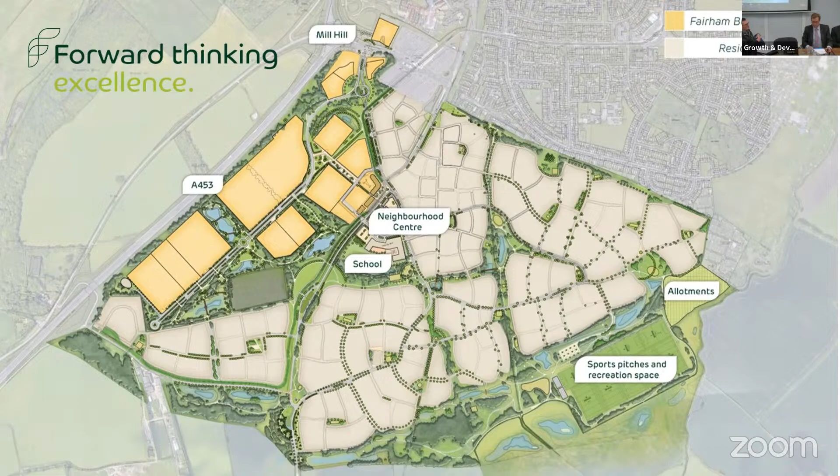In terms of phasing, there are 13 phases to the housing development, and in addition we have the commercial/employment phase, a neighbourhood centre, lots of landscaping, a sports pitch area, and an ecological area as well.

In terms of the phasing, we have already agreed terms with 3 house builders. Phases 1 and 3 are at the top end of the site towards the edge of Clifton, and phase 2 is at the southern edge of the site next to Barton Lane. Those are going to be the first phases to start, and we're hoping they will be starting very soon.

We have also identified a house builder for phase 4, and we are currently appraising the 5th house builder, so very shortly we will have 5 identified house builders on there. I think it's in the public domain that the first 3 are Redrow, Countryside, and Barratt's, and it would be unfair of me to name the other 2 just now.

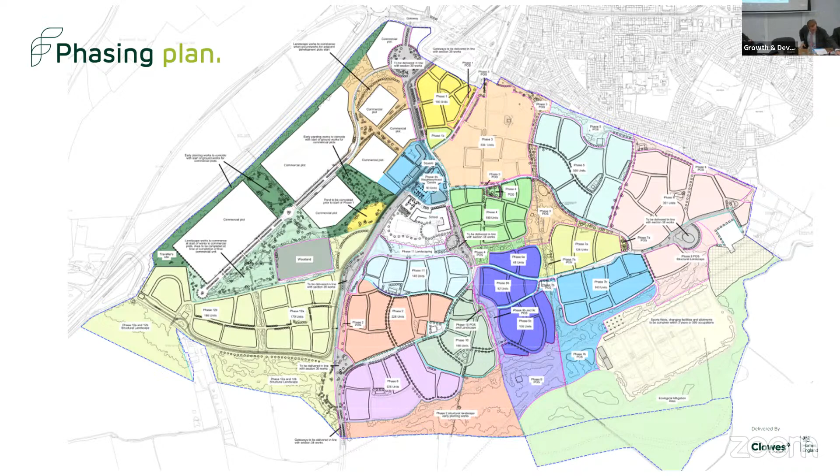I'm going to hand over to my colleague Ali for the next few slides, and then it will come back to myself.

Thank you, Rob. My name is Ali Malik, I'm a Director of Infrastructure at Clowes Development. So what I wanted to do was go through what we've been doing on-site and elaborate a little bit more in detail.

Over the last three to 3.5 years, we've been very busy with our design team in terms of infrastructure planning, engineering designs, seeking approval for highways, utilities, and drainage. That's the backdrop of a lot of the work we've been doing. After that, we've been tendering work with contractors, and then going out onto site doing physical works. What you see in green is predominantly the main piece of works we've been undertaking over the past 3 years. The areas in green are either completed infrastructure, nearly completed, or in some cases immediately about to start, with minor finishing works effectively remaining.

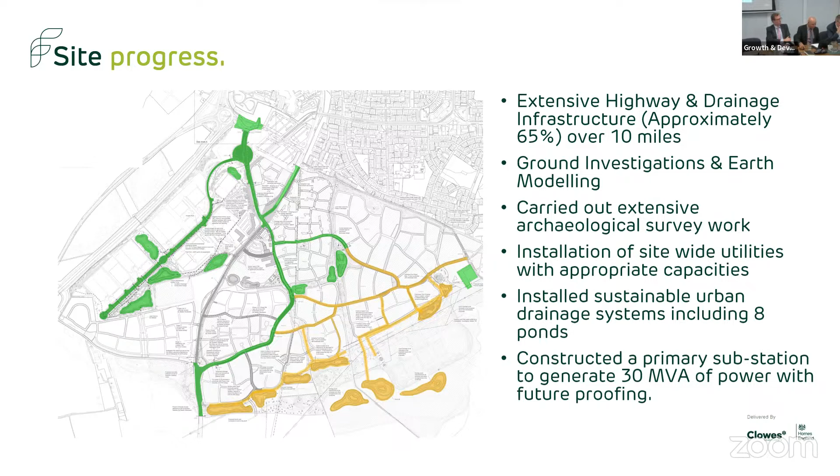So moving on, but some other elements that I think are useful to understand about what we've been doing over the last few years. When we took the site on, we inherited about 80,000 cube of leftover tram spoil - equivalent to about 5,000 lorry loads coming off the site. We looked at whether we could amalgamate that within the site, and that's exactly what we've done successfully. Our engineers looked at the material and we've effectively amalgamated it within the site for our overall earthwork modelling and cut and fill strategy.

More recently, since we started these works in September last year, we've been working on the Park and Ride access road, which probably everyone has driven by. This is the gateway to the site, effectively, so it's been really important. It's been a little way in the making to get to this position in terms of planning, engineering designs and approvals. The Northern Gateway, the roundabout to the south of the Park and Ride access, is also part of the works we're working on at the moment. We anticipate finishing that in early to mid-April.

The strategic foul sewers is one of the things that's quite important to note. We looked at the extent of sewers needed, the capacity with Severn Trent Water, understanding the development - it's a large scale development - and the extent of capacities needed. We did very early on a modelling exercise with Severn Trent to discuss what capacities we needed. There were some off-site reinforcement works that we needed to do, which we did, and it was probably one of the first pieces of infrastructure that went in, about 2.5 years ago now. So effectively the site is ready and can take the entire development in terms of the foul drainage network.

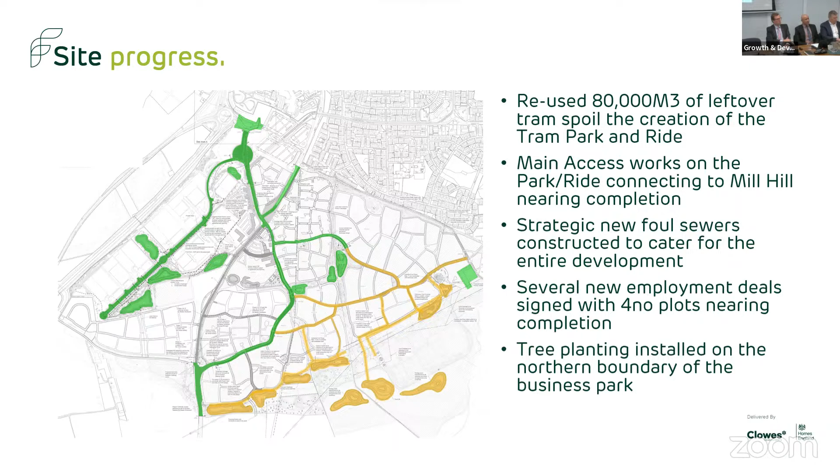I've got to talk about my primary substation again because I'm so proud of it. This is another closer image of the A453 and the works on the Park and Ride. At the top right corner, they allowed me to go in and take one photo - this is National Grid, the actual primary substation, and those 2 transformers effectively serve the whole of the development. Quite impressive, I think.

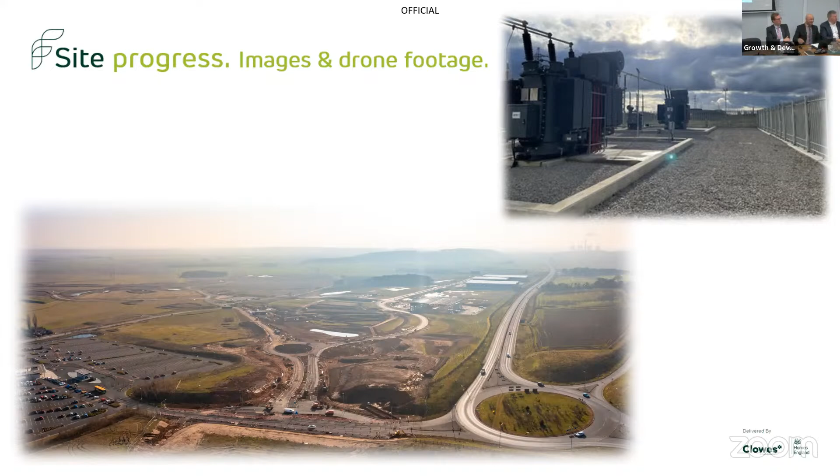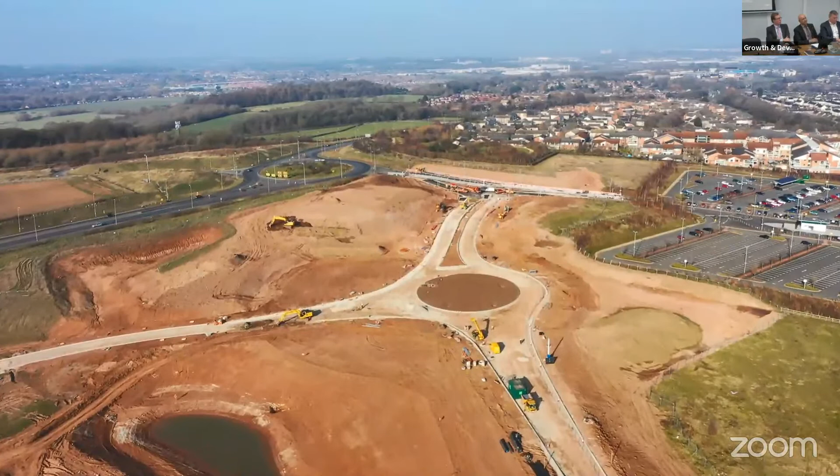Moving on, this is a fly-through drone footage, which I hope will work, showing the extent of infrastructure. Unfortunately it's a little buffering, but it will give a good idea of the development. This roundabout you see here is the Northern Gateway roundabout, and that connects to the Park and Ride - that's the first phase of the Park and Ride works, and there is a second phase. This connects to the A453 Mill Hill.

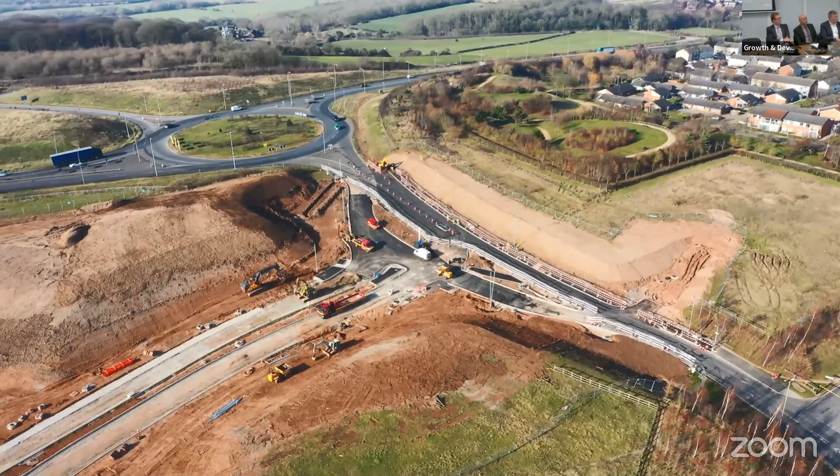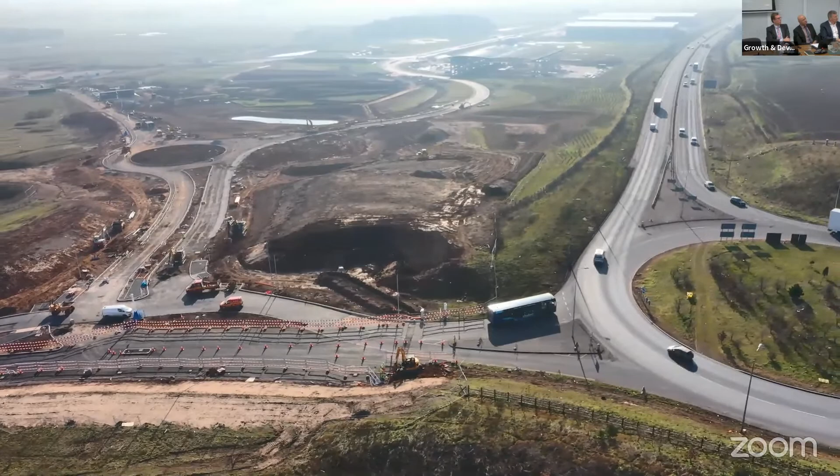So this just gives you a different angle, but what it does show is the infrastructure that's been constructed down to the commercial zone, and it also works towards the stagger junction, which is the heartbeat of the development.

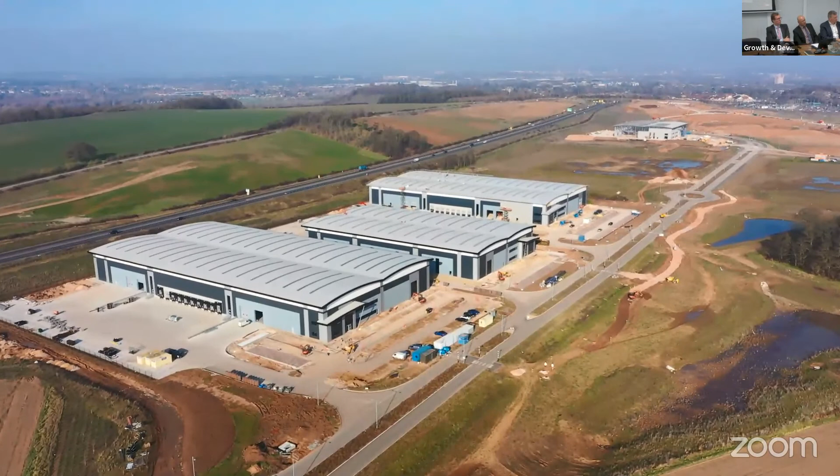And this is just the commercial road, the infrastructure, the drainage that's been put in, the ponds that have been put in to support that, and also the actual buildings themselves. You can see quite extensive earthwork modelling that we've been working on here. It's taken some time, but it's a moving process that we're working with.

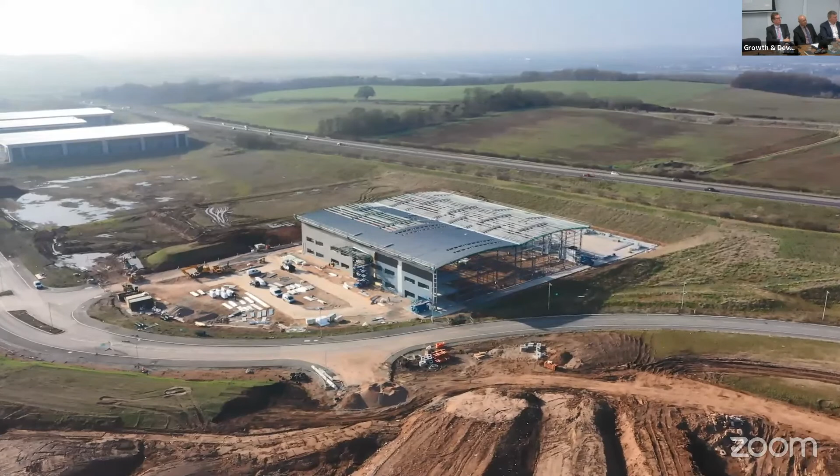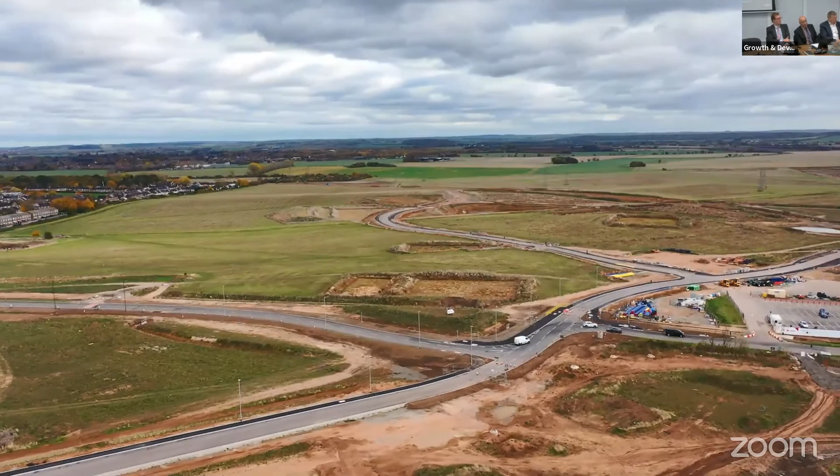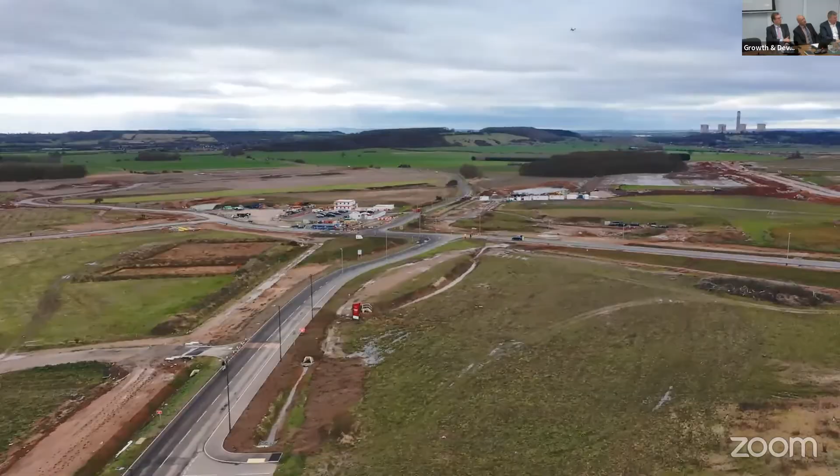This infrastructure was actually put in about a year and a half ago. This was the first main key infrastructure, the stagger junction, which is effectively the heart of the development. Beside it will be the neighbourhood centre, where those white cabins are. And the large loop road running around will connect to Nottingham Road - that is going to be the new Nottingham Road.

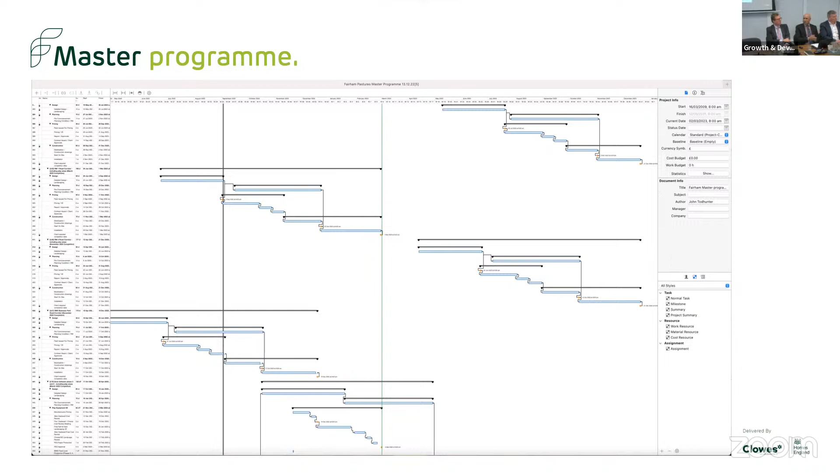As you can see, we've been really busy, doing a lot of work over the last 3.5 years. I think it's important to understand the programming element of what we've been doing. This is a snapshot of the master program - there are many pages and many tasks to it, but it gives an idea. There's over 750 line tasks within our master program, showing the sequencing and work we've done to get to the right sequence at the right time, to effectively achieve what you've just seen in the images and drone footage.

So what are the next future milestones? Well, the employment buildings, we're aiming to have them complete in May 23. The mill access, in terms of what you've just seen, in terms of park and ride, will be complete May 23. We're anticipating housing to start in June 2023, with some completions by the end of the year, so occupations by December 2023.

I didn't actually highlight it, but we've got playing fields to the south of the development, and the aim is to do a lot of earth modelling around those playing fields. They are quite close to the south area, with the view to have that open to the public in June 2024. And as part of our Section 106 obligations, we're currently working on the design for the neighbourhood centre, and as part of that we'll be working on a land transfer of the school and also the health centre, Q2 and Q3 2025 respectively.

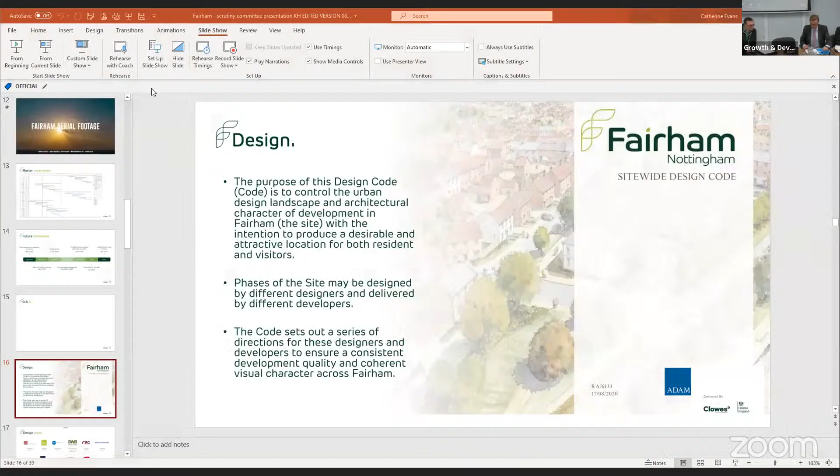So in terms of the design, what we wanted to achieve here is something that was very high quality and a sustainable development that would be very attractive to residents and employees. And what we did here, we had a clear vision when we set out. We wanted to have greater control in this development, so Fairham Pastures Developments, aka Clowes and Homes England, we are taking on the master developer role. One of the key things we wanted to do was set the bar at a high level.

In terms of design, the way we've done that is we've introduced a series of design codes which set out the vision for the site, and as the slide says, they focus on architecture and landscaping. We're very keen to get the landscaping as advanced as we can.

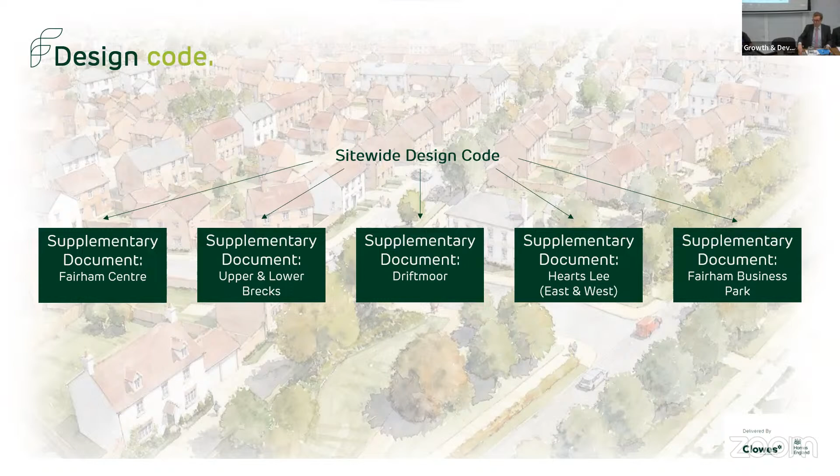In terms of the design code, we had a site-wide design code, and underneath that 5 supplementary documents. Don't take too much notice of names like Upper and Lower Brecks, Driftmoor, or Hearts Lee - they were just examples of neighbourhoods. We will be giving them proper names in future, and might even run a competition to name those areas. The intention is there will be a supplementary document which deals with the neighbourhood centre, the employment area, and each of the housing areas.

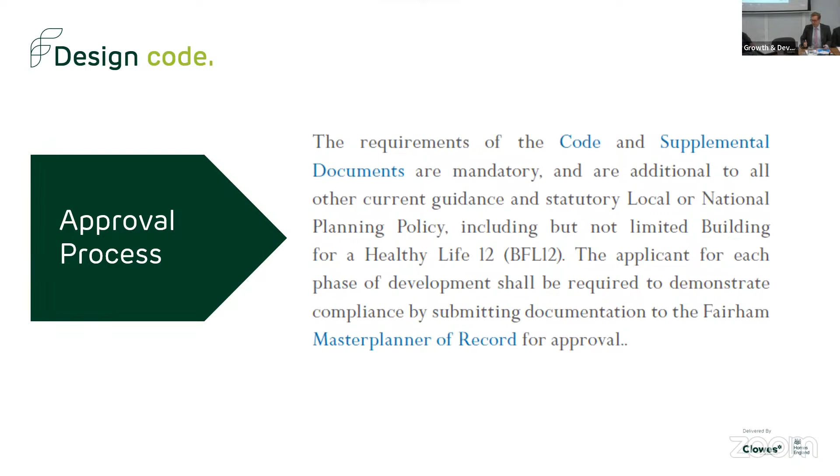In terms of the approval process, Adam Architecture are the master planner of record, and everything a house builder produces effectively gets scrutinised by Adam Architecture on our behalf. Even before then, it gets scrutinised by Homes England and ourselves - I'll show you a diagram in a few minutes. The scrutiny here is right from the very beginning, and every house builder we've contracted with has gone into this with their eyes open.

So the actual design process itself starts at a national level - national policy filters into this, then local plan policy, and then the codes. All of those are supported by individual house builder pledges as well. Some house builders will go way above the normal standards, and in choosing the house builders we've chosen, we've been very mindful to set the scene at the gateways.

So at the Clifton Gateway, where you're coming from the existing Clifton built-up area into the site, from the Mill Hill Gateway, and then from the Gotham Gateway, if I can call it that, we will have developments there that set the tone for the rest of the development going forward. One of our key aims is that we want the last parcel or phase to be even better than the first, because everybody will try to beat the previous phases, and new initiatives will come in from national level and filter down.

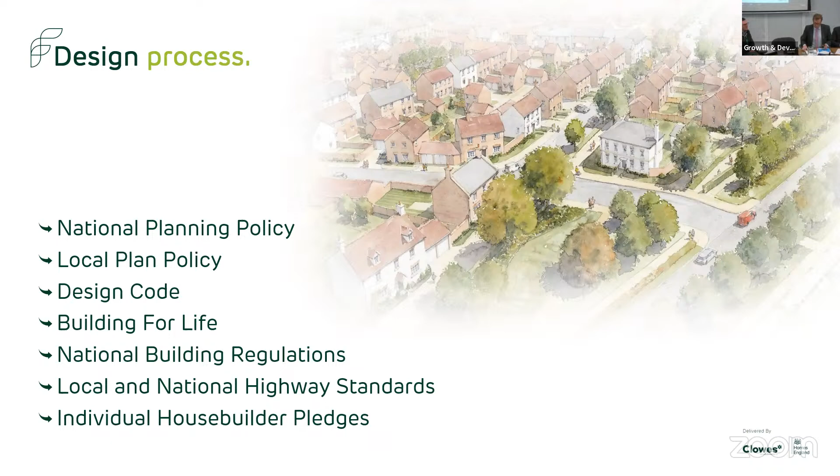In terms of the process, this illustrates it quite neatly. The tender process - when we take land to the market, whether that's Fairham Pastures or Homes England, we aren't just looking at the price. We're looking at the quality of the layout and the house types, and that has a factor in terms of us choosing which house builder wins the site.

The next step is that the house builders submit their plans to us. We review them, and then they go on to Adam Architecture or Urbanism. Having gone through those phases, a planning application is submitted to the Borough Council, and it will be scrutinised again by the development control team, with input from the statutory consultees. So county highways, education, everybody else will have their opportunity to comment on it, and then ultimately the decision rests with the council in terms of the scheme that's approved.

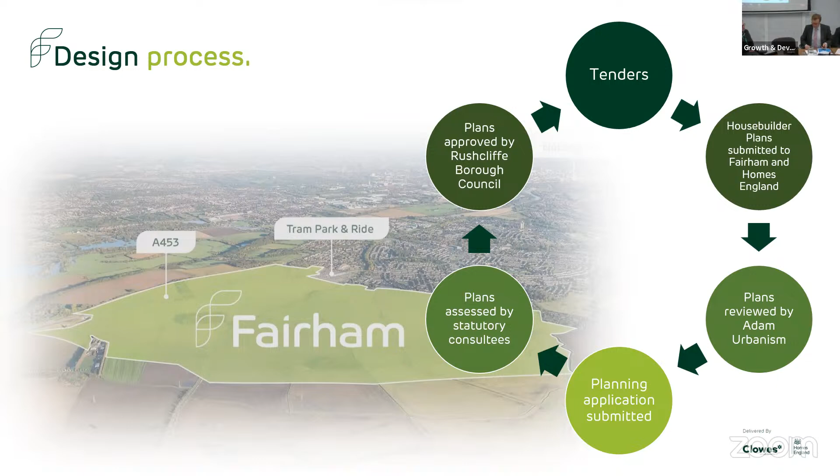So that's the design. Sorry, John, if I've - I don't know if you want to add to that.

I think it's important to say that what we wanted to ensure - I think we see so many developments where they are big developments and you've got individual residential developers on there, and you get this patchwork quilt of different styles, different materials. It was certainly Clowes's vision to ensure that we're going to get a consistency across the site, and that consistency - the cues are taken from the surrounding areas.

One of the pieces of work Professor Robert Adam did, they visited all the villages, all the towns around, and they picked out those cues. So the overarching site-wide strategy does exactly that. It says to the developers, these are the bricks we want you to use, these are the kind of roof tiles we want you to use, these are the style of windows. So you're not going to see mock Tudor or mock Georgian - you're going to see what is a local vernacular.

But the codes are designed in such a way not to pin those guys down so hard you don't get their flair. We still want that flair to come through - it's a consistency across the development. And within the codes there are what we call heat maps, so certain road frontages which are common to all will have greater control, as opposed to what's inside a particular phase, where there's a little bit more freedom for those developers to do what they want. But as Robert says, the drive is that quality.

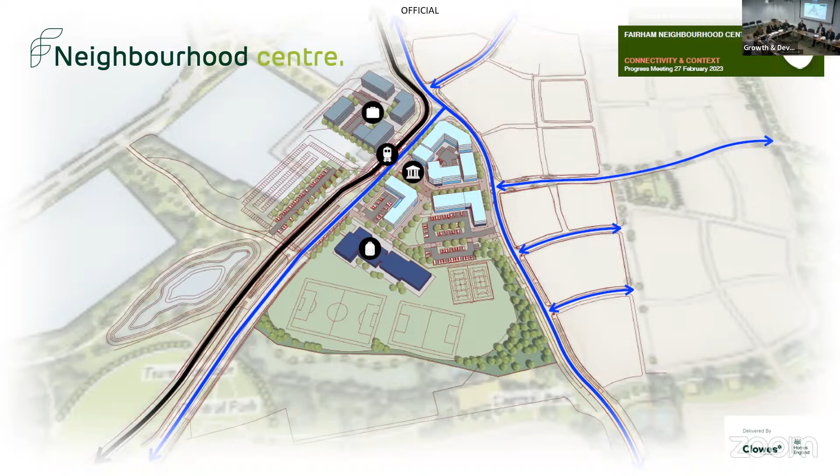So in terms of public transport, we've worked really hard with Nottinghamshire County Council, the public transport department within the council. Our master planners, Adam Architecture, and our engineers worked very diligently in terms of how we can create the space and integrate a really well connected network within the development. We've looked at bus services, bus stop locations, the existing tram stop as it stands currently and how that permeation is between that and the rest of the development and indeed the phasing. We've looked at potential tram passes, and we've been working with NET in terms of how we can encourage development as they come along, what types of tram passes we can provide to effectively encourage public transport.

We've also been doing a lot of work in terms of the future tram extension, how that will function within the development, which is quite a hard task in a way, because that could be quite some time away - it could, depending on funding, various government initiatives and everything else. But we have had to cater for that in terms of where that is going to be and safeguarding a tram corridor effectively, while also considering the now as well as the future and what that will look like. And we've very much looked at our cycleway and pedestrian links and how that ties in all within the development and how it connects.

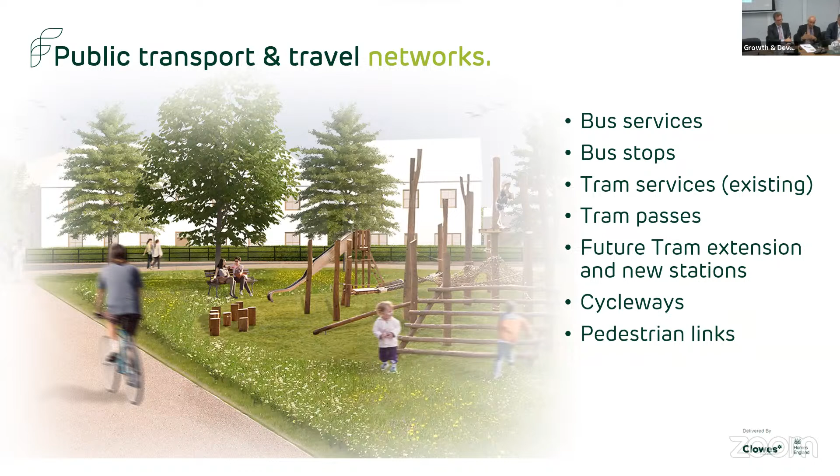So what you can see here actually shows the bus stop positions, and this is an approved plan that we've worked very hard with the local authority on, in terms of having the right positioning of the bus stops in the right places, considering things like safe paths, quality crossings, traffic speed, and walking distances from parcels. Walking distances from various different phases that come on board is normally a 400-metre radius.

What you see here is two loops effectively. You've got the main primary route, which is the blue route, Nottingham Road, and then the secondary loop that comes and feeds into that. That's all predicated on the phasing strategy of the development as well.

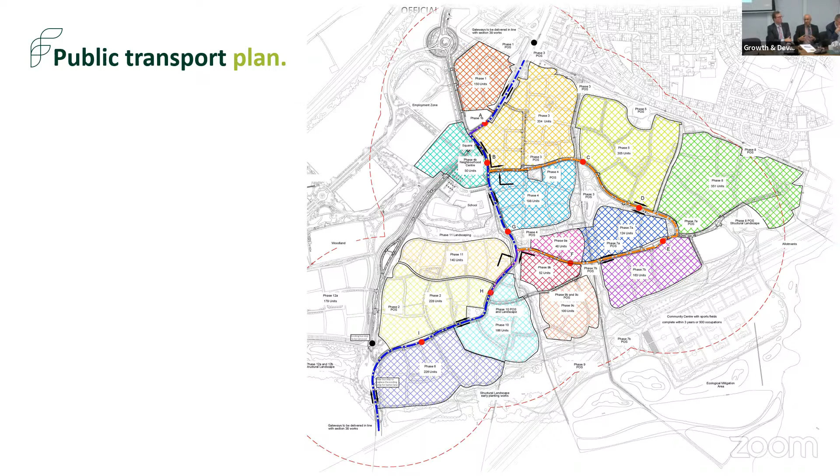One of the questions asked was, if you have a phased development come forward, how do you encourage public transport? What we've looked at, in discussions with county council highways, is to provide a type of temporary bus turnaround facility when we put that infrastructure in, and speak to bus operators, so we've got an interim period as well as the final solution. As parcels move forward and housing developments come on board, infrastructure will be in place, but temporary infrastructure and phasing will also be in place to encourage public transport and use of the bus service.

I think, John, you can correct me if I'm wrong, but I think there's about 3 to nearly 3.5 kilometres worth of cycleway footway. I think it's more than that. Probably right, yeah. So it's extensive across the whole development.

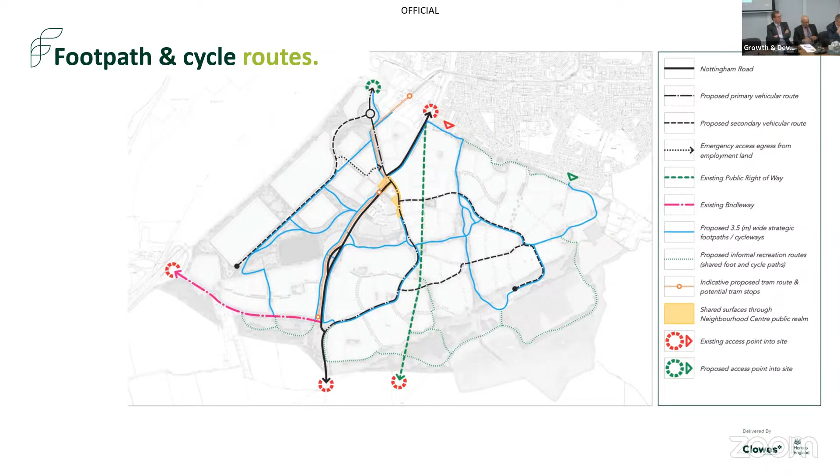On the cycleway, that's really encouraging to see the cycleways and footways. But I was shocked to discover the Highways England protocols for cycleways are much more onerous than I ever imagined they could be. Does that include whatever the current legislation is for cycleway? Because I see it's combined footway and cycleway. You need a lot of land, don't you, to have a cycleway which meets current standards. So do we have a guaranteed artery all the way through it, so it's not going to be that constipation blockage to any other cycle networks either side?

Yes, there is a strategic route from north to south, but the important thing is separating out those footpath cycleways from the traffic, and that's the new legislation you're talking about. A lot of the strategic routes are within the green lungs, the green open spaces, and those green lungs crisscross the site, so children can come out of those phases safely onto those green corridors, which will take them to the school and down to the sports pitches.

That will take them to the strategic play areas all around the site, so it is future-proofed in that respect. We're guaranteed we've got a cycle route. It's designed, they're designed, okay good.

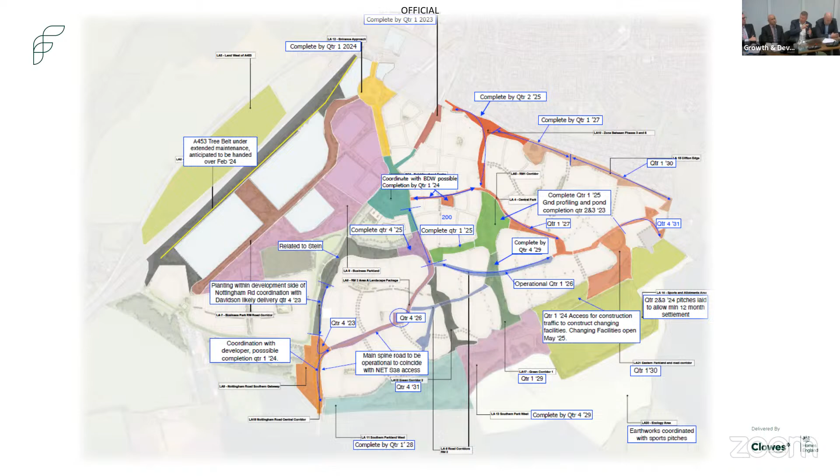In terms of the commercial area, I know there's a lot of concern about where we're going with the landscaping. The A453 was planted a couple of years ago, we've replanted a lot of the dead stock, and that's under maintenance again. For the landscaping coloured purple, ground preparation will happen this year, and as we come into planting season at the end of this year, that will be planted up. Some of these areas do have ponds, so it's not just delivering trees and the kids' play area, it's modelling and delivering on those ponds as well, and everything that goes with them. That is part of the biodiversity.

So going on to biodiversity, because everyone looks at this and thinks, you're building across acres and acres of nice fields. Those fields have been intensively farmed over the years, the ground is saturated with fertilizer, insecticides, and all the rest of it. As part of the planning promotion through the local plan review, and then the planning application, we had to do quite a lot of studies on what was happening out there in terms of bird life, badgers, otters, and all the rest of it. Interestingly, the two species that were really suffering were the skylark and the golden plover.

Both those species' population was dying off, and there was a noticeable difference, certainly with the golden plover, when the A453 was put through, that they did dive. So as part of this whole biodiversity and mitigation effort, we should be helping to create habitats that will increase that population.

We've got an entire ecology area down the bottom. We've got ponds, scrapes, islands, owls. We're even re-meandering the Fairham Brook at the top corner, you can see there's a blue blob there. What farmers did in days gone by was take a watercourse and straighten it so it became easier to farm, but that didn't do a lot for the ecology. You need those bends, so we're introducing that as well, along with the other measures we're putting in place.

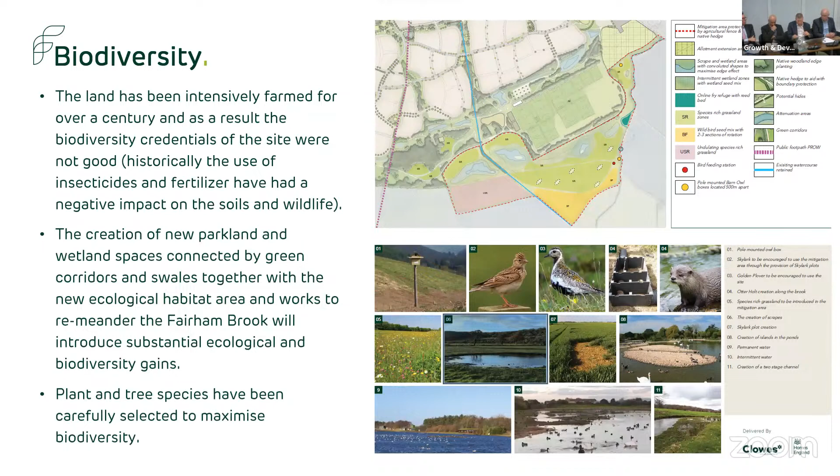I think that really concludes that. So, questions and answers. Thank you.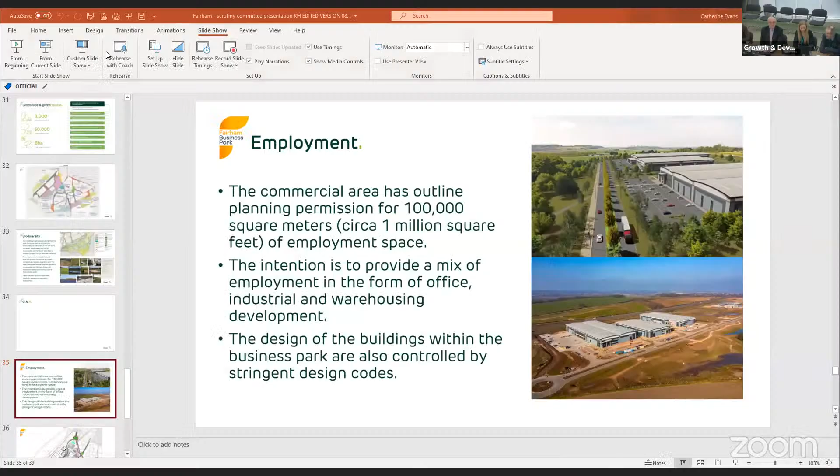I'm pleased about that, Councillor Barney. I think we've got one last piece to come. Thank you. Well, hopefully we'll save the best till last - I've sat here for an hour and 40 minutes and said nothing. So my name is James Richards. I am the Development Director at Clowes, ultimately responsible for the business park.

In summary, the business park has consent for 100,000 square metres, or in old money, about 1 million square feet. Currently on site we have 4 buildings, totalling 333,000 square feet, or 31,000 square metres, and they are being delivered for 2 clients.

Both of these clients are effectively out in the press. One of them is Scientific Laboratory Supplies - they're going into the building shown on the next slide with the master plan, closest to Mill Hill. The other buildings, the 3 shown in the picture in the bottom right-hand corner, are for Hines, who are an American fund.

I think it's fair to say, as we're in control of Fairham as a whole, it was only right that the business park was dealt with exactly the same as any house builder would be. So even though Clowes Developments are effectively delivering the business park, we treat ourselves like any buyer of the land - the design codes placed upon us are as strict and stringent as those on the residential development.

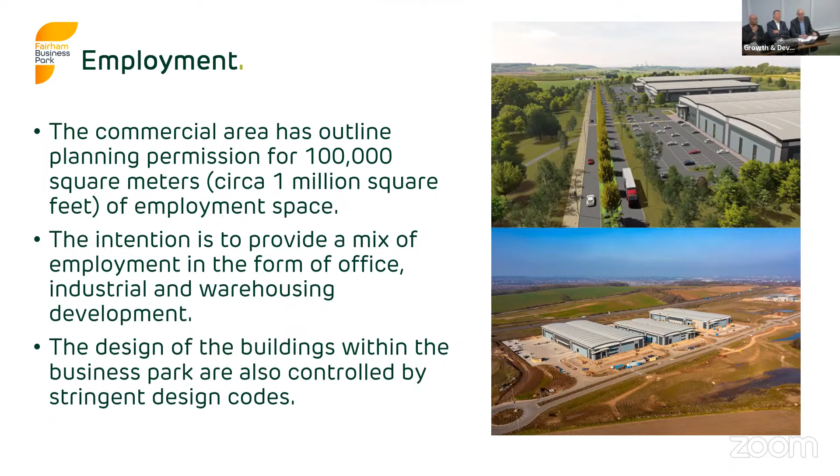A full array, if you don't have battery storage, you would be generating power that you just physically couldn't use. So we effectively allow the PV to go on to suit the occupational need of the occupier. Two applications will be shortly coming into Rushcliffe for PV on two of these buildings, and part of that discussion will have to be with the airport. We are on a flight route, and the airport does give serious consideration to large installations of PV because of the flight route.

We are currently working with two other occupiers. I would expect applications to be coming into the borough within the next six weeks for the units that sit between SLS and the Hines buildings.

In terms of the master plan, one of the hardest areas we've had to deal with is the area that interlinks with the neighbourhood centre and the residential. There's quite an aggressive change in topography as you come off Mill Hill Island and drop down towards the neighbourhood centre, and similarly the integration with the aesthetic of the neighbourhood centre. You've seen already a design potentially having car parking that has to stray out into the commercial zone, which has basically meant that area of the master plan has had to go on hold while we understand the technical implications of the tram corridor.

Ultimately, it's vital that that part of the development is built as one and considered as one. It is where most of the B1 office accommodation is due to go. I'm sure at the moment there's been comments around it appearing to be just more commercial style sheds. Rest assured there is a lot of office to come in the scheme, but that lends itself to being able to work on tiered plateaus where we can use the topography to help with layout.

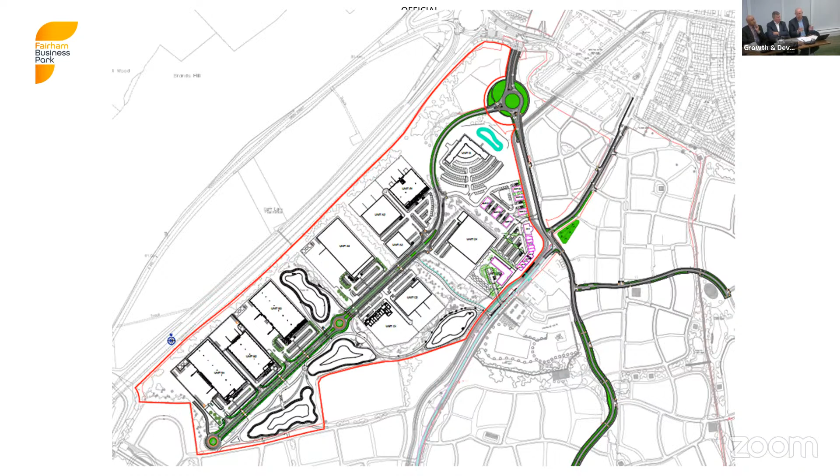So as the neighbourhood centre develops and its plans develop and start to freeze, we can then start to work our designs to work with them. And office buildings allow us to elevate them using more traditional material to enable us to get more of a synergy between elevations, because you don't want two very stark elevations either side of a road.

So finally, in terms of jobs, which I think is a very important one that ultimately the business park is there to deliver on: for units B2 and B3, I was hoping tonight to be able to name the occupier. I can't, I'm afraid it's not signed, so I'm under an NDA. But Hines do have a Nottingham-based business that is extremely close to signing up to take units B2 and B3.

That will effectively generate 400 new jobs. It will secure several hundred new jobs already in Nottingham. Importantly for that Nottingham business, they're actually relocating a plant from Bristol to Nottingham to really decide that Nottingham is the place they want to be. They're taking a long-term lease with an extremely large commitment in terms of fit out, running for several millions of pounds. So they will be a great addition to the park, and I think a great win for Nottingham.

B1 is currently being marketed. It is available, and we anticipate that to create circa 200 jobs. Unit A1, which is SLS Medical, that will accommodate 170 jobs. They are a Nottingham business, but we are safeguarding them, keeping them in Nottingham, and allowing them to grow and expand.

I think a comment was made earlier about how we've been selective of occupiers. When the name of B2 and B3 comes out, you will see that there is a synergy to the health and medical profession. We have had a lot of inquiries for the site, a lot of interest in the site. We are being quite choosy on who we take. We want to create a business park, not an industrial park, a business park. These buildings need to, and occupiers need to, work together, have the same ethos as we have, and really look after the space we're creating. We haven't got a huge amount of space. I know it looks a lot, but it's not, and it will quickly fill. So we're determined that we work with the right occupiers and the right people.